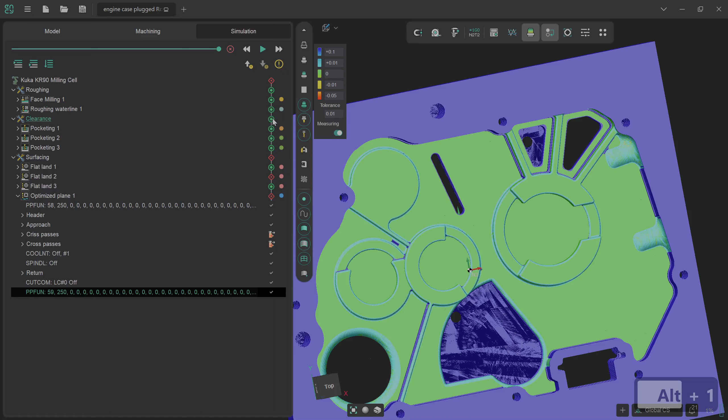Hi, so in this video we're going to start on the finishing process for this. I appreciate it doesn't quite look like it's ready for that yet, but bear with me. And we are initially going to start by cleaning up all of these interior profiles.

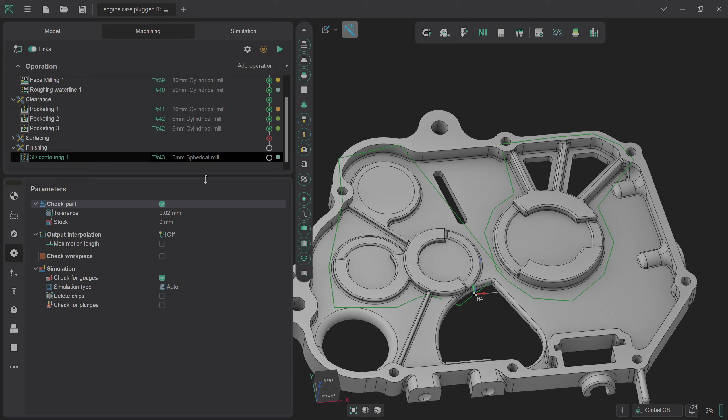So we go back to the machining space and we're going to define a new setup stage, which we are going to call finishing. And we are going to define a contouring path at this point. We're going to use the 3D contouring tool. We're going to stick with the 5mm spherical mill because the radius of a lot of these fillets is actually 2.5mm, which is very convenient for our needs.

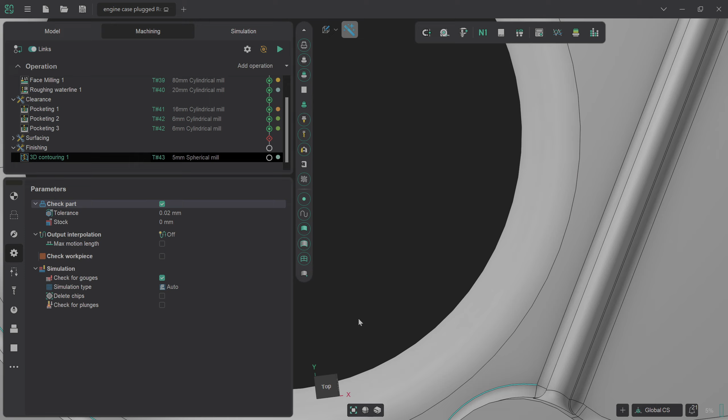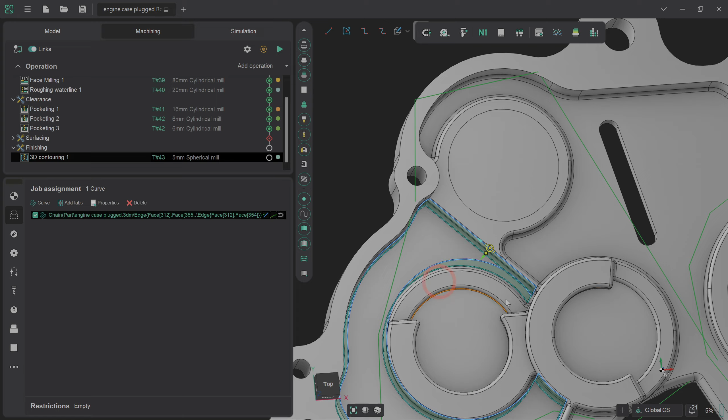And we are going to grab these contours and we're going to define them as our contour paths. So I'll just take a second to select all of these. And we now have our first one defined. So we will go to here and curve. And we want our cutting tool to be on this line instead of inside it, because that's the offset that we've got.

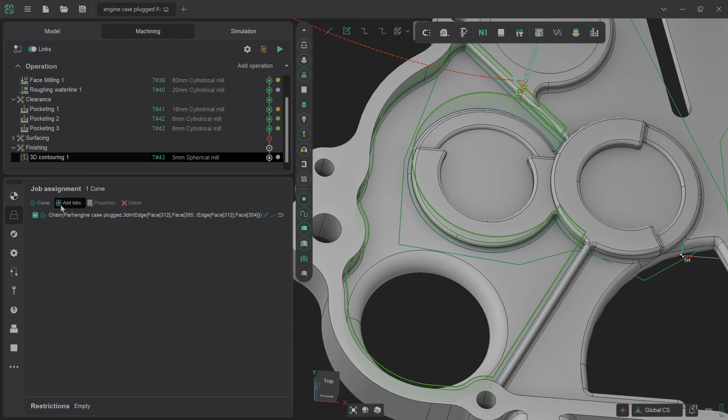And we will quickly set the 6th axis control again and then go back to generate the toolpath, and we should have a fairly clean toolpath from here. We'll go to the axis map just to double check, build the graph, update the toolpath, and we'll now simulate this. Fortunately, due to it just being a simple contouring path, it's a very quick simulation.

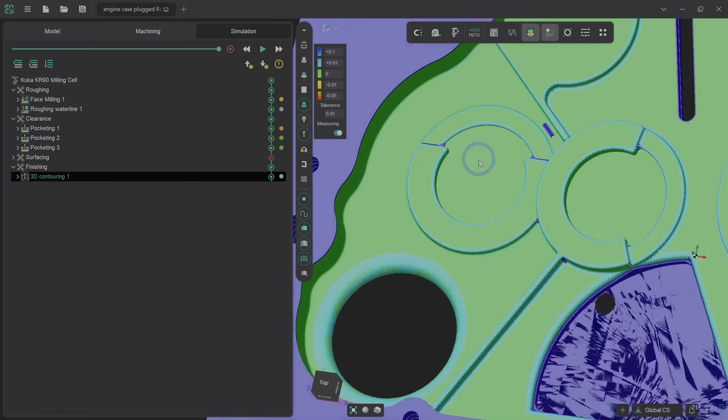So if we click run, we'll see how it's swept around there and there's no excess material left over. We'll do a quick verify compare, and that entire region is now a nice green. There's going to be a couple of small, very clean up parts to do in here, which is not the end of the world, but it's worth taking note of.

However, we can now copy and paste this particular solution for all of these panels all the way around. So I'm going to quickly go around and select all of these. I'm just going to pause the recording whilst I do so. And once I've got that ready to go, I'll come back to you shortly.

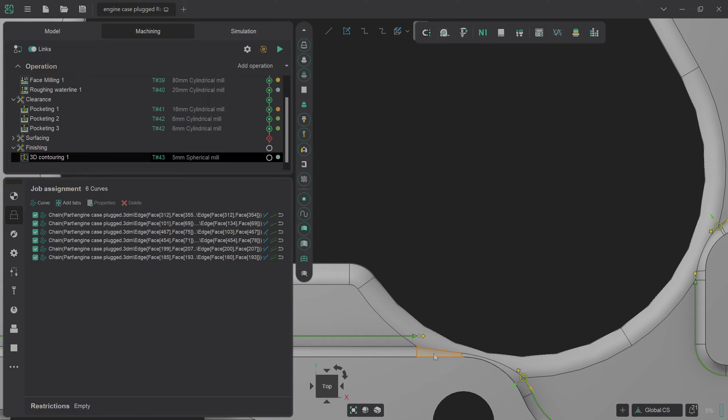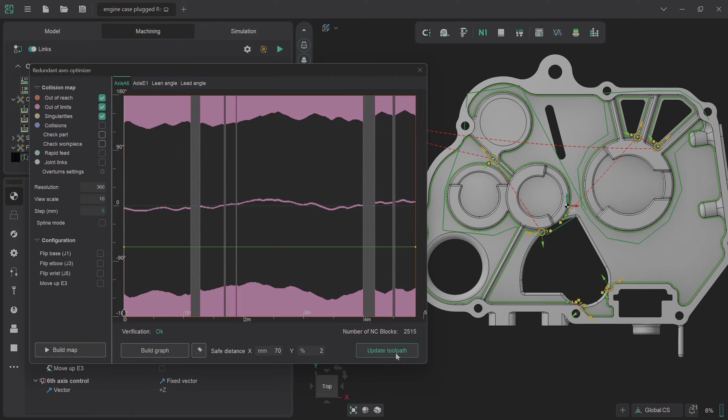Okay, so as we can see here, I've now selected all of these interior curve lines. I've kept them as separate curves where there's the small overlap regions here that we'd previously highlighted with our complex plane. So we can now go into generating that toolpath, and we can just double check the axis map again, which we should be becoming extremely familiar with throughout the course of this video. We update the toolpath and we are now going to go in for a quick simulation.

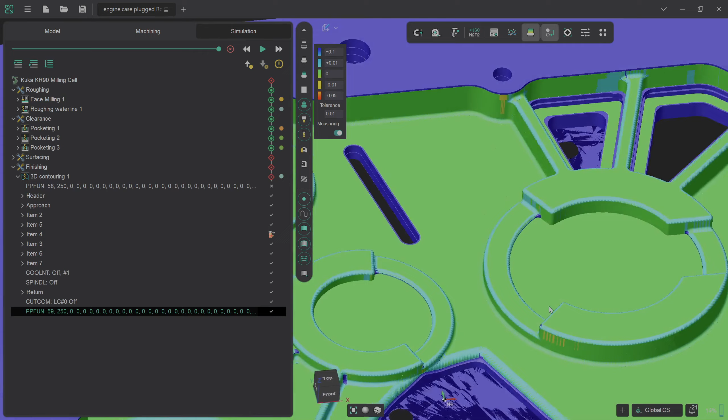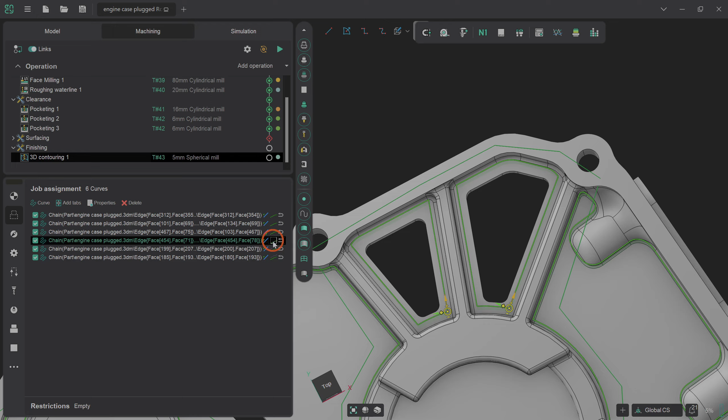And we're going to check the verify compare tool, and we can see now around all of these bases we've now got a much cleaner, much closer to the perfect zero mark than we did before, which is ideal. Although I've noticed that we've not seen anything much going on with these bits, so we're going to go back, and the reason for this is because these final couple of tool passes are not set to be on the line, they're set to be inside the line, which is very much my mistake.

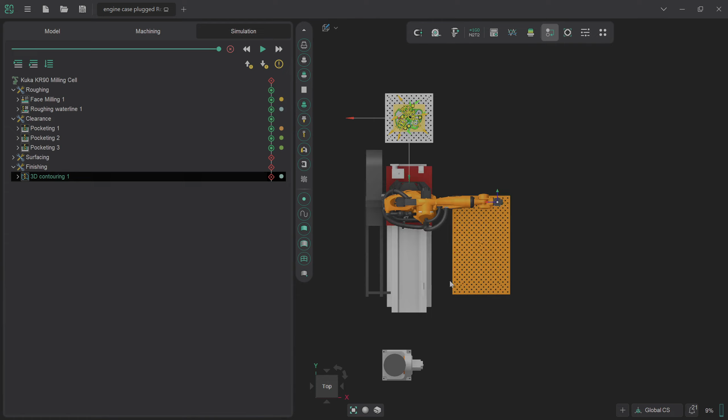So I'm going to regenerate that. This is something that's absolutely integral whenever you're dealing with contouring as well, so it's a mistake that's worth noting and very much worth picking up and learning from. So let's go back into simulation now and we'll rerun this. Let's just get a... don't know why that's flipped around. Sorry about this. Let's quickly rerun now.

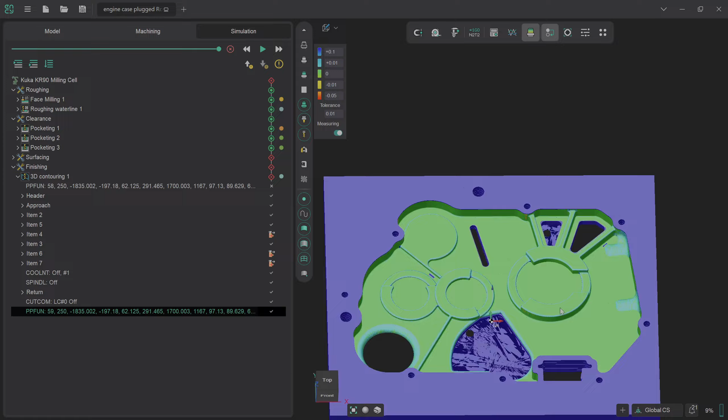And once that's run, we'll now do a verify compare, and we can now see that all of these regions are lovely and clear and green, which is exactly what we're after. So we're now getting pretty close to a more viable finished part. There is obviously a very small amount of excess deflection here.

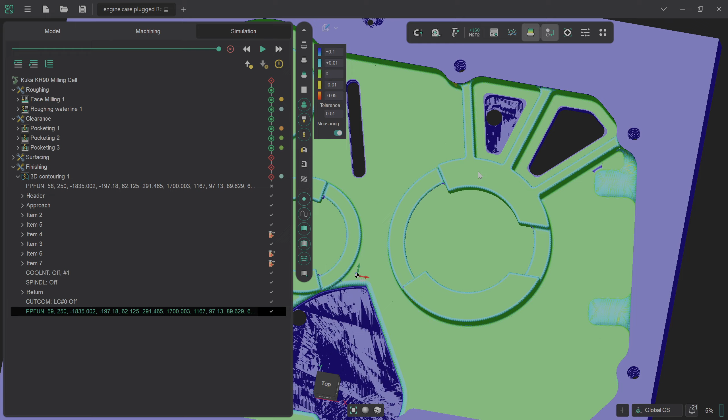We can go back and we can refine these complex paths by enabling the scalloping check on them as well. But I would like us to get to a stage where we've got a more complete part before we start fine-tuning the last details of it.

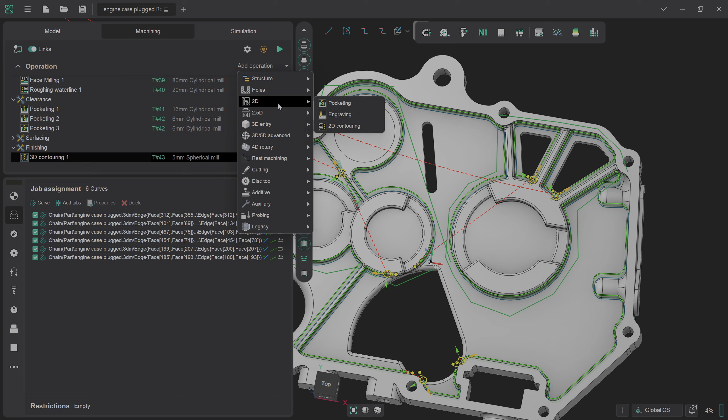So we are now going to start looking at cleaning up all of these profiles as well. So I am going to go back and we're going to use a 2D contouring path for this time. So we go with 2D contouring and we're going to select each of these curves.

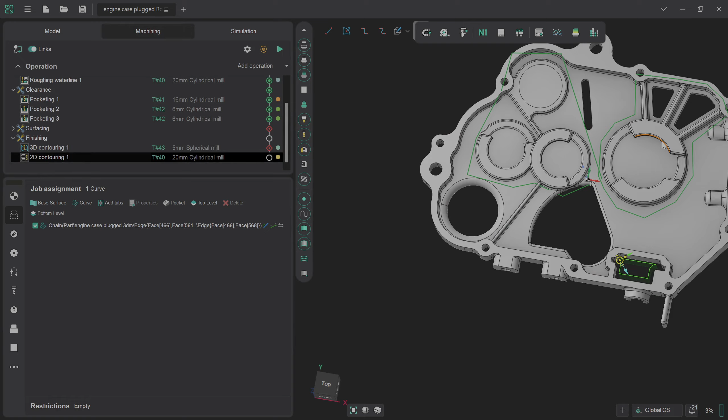So if I remember correctly, all of the bores, yep, they had a little bit of excess on them. So we're going to go around through all of these on the two separate level planes that we had determined before. And we're going to select each of them and we are just going to clean them out, get them to final size.

So let's just grab the last of these and select those curves. Okay, and obviously we want our contouring to be on the inside of these, but we don't want there to be any excess to account for.

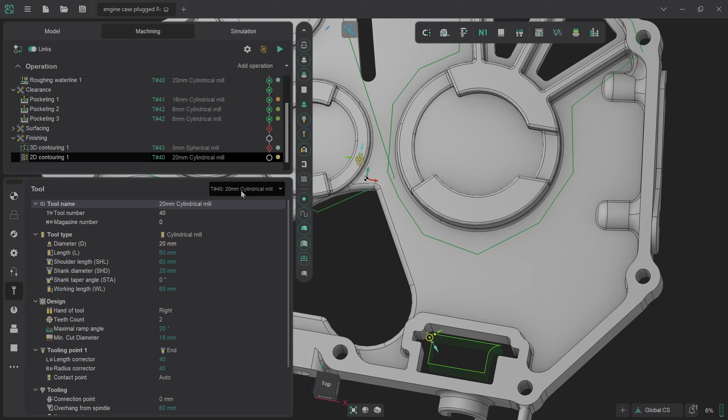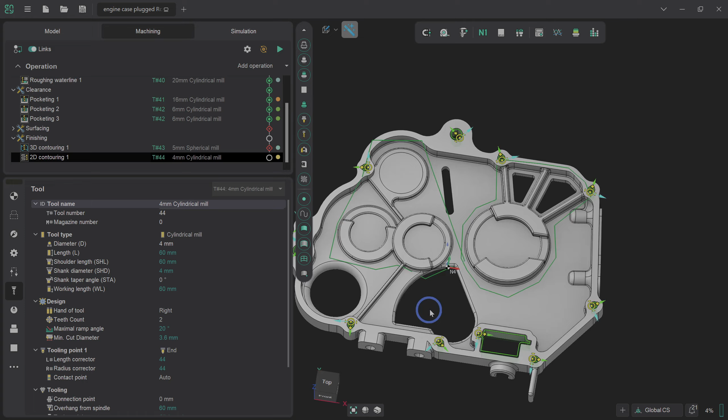We're going to change the tool on this from a 20mm cylindrical mill to, we're going to go with like a 4mm, we'll go with the 4mm cylindrical tool. So if we select this one for now, and then we change the diameter on it accordingly, and set it as a new tool. We'll keep the lengths and everything the same for now. And we do the last little bits we need to do before we run it.

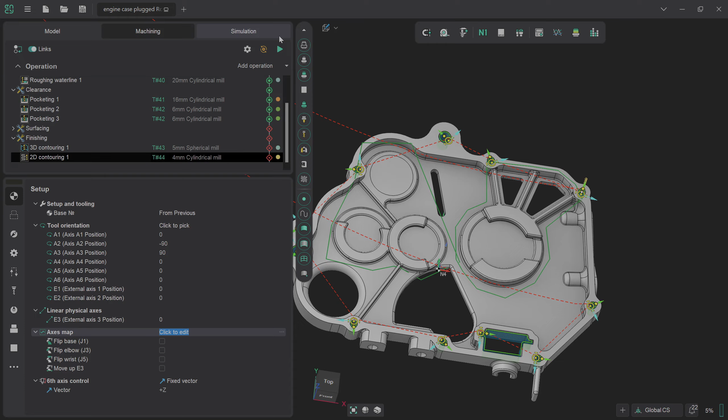Okay, so we're going to have to quickly go through that toolpath. Update and run now. Now if we simulate this, we should see all of our bores get cleaned out and brought to the correct size, at least all of our deep bores, and then the shallow bores we'll do in the next pass. Just very quickly check compare. Lovely green surfaces there. This is exactly what we want to see.

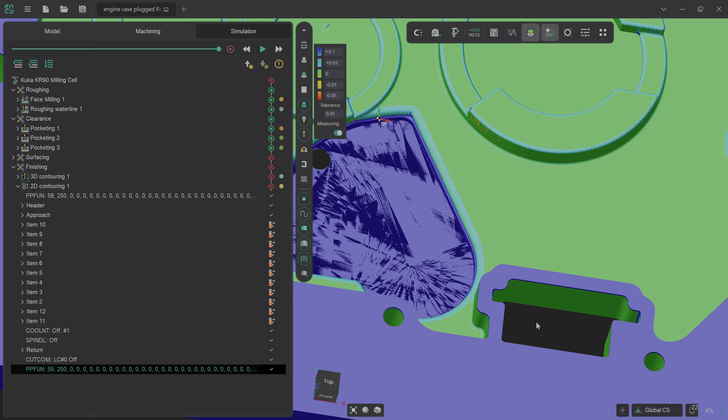Now again, as I say, the difference between the solid model like this and the voxel model like this is much closer to actual real world precision, whereas the voxel model is significantly better for more organic forms because it's volumetrically defined instead of working off of solids. It does mean that it lacks a little bit of the final precision compared to this though. So this for hard material surfacing is exceptional and cannot be beaten in my opinion.

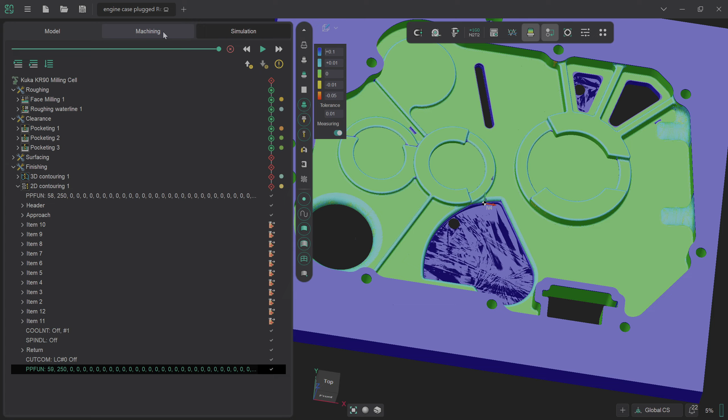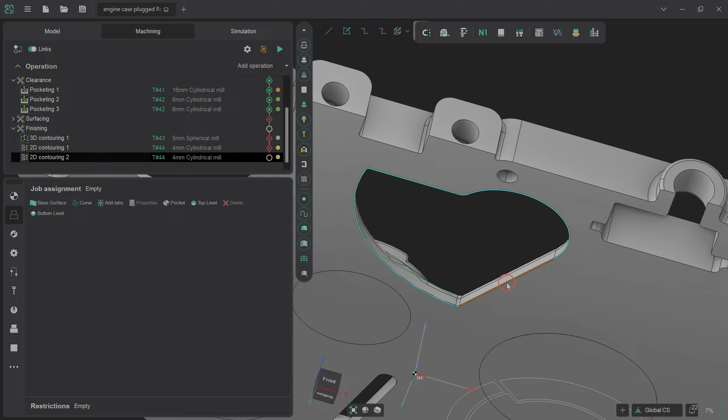So I'm going to turn that back off and we're going to go back now and we're going to duplicate this 2D contouring path and we are going to redefine each of these parts that we're going to be cutting, because we're not going to cut those ones. We are instead going to go from beneath because these parts have got curved lines to them. So we're going to select that curve. We don't really need to go from underneath for these ones, but we've got it, so why not?

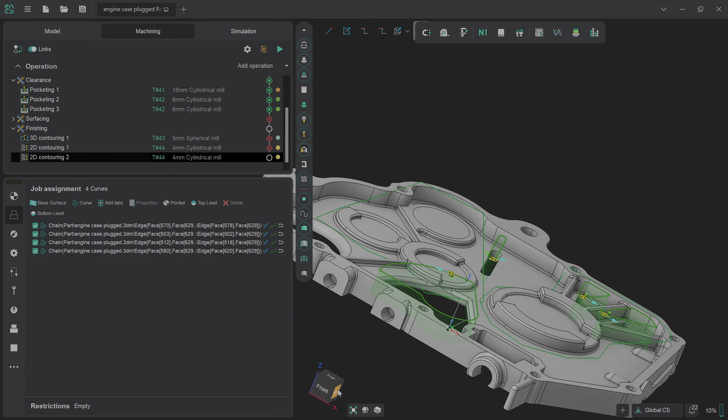And we are going to grab that one as well before I forget. Don't know why I keep forgetting that one. It's every bit as important as the others. We are going to define our top level, and that should see us done for that. So fixed vector is good. Generate the toolpath. Give it a second to think about it. And then we check the axis map and we should be good to go.

Sorry, there's my dog shaking his head in the background there.

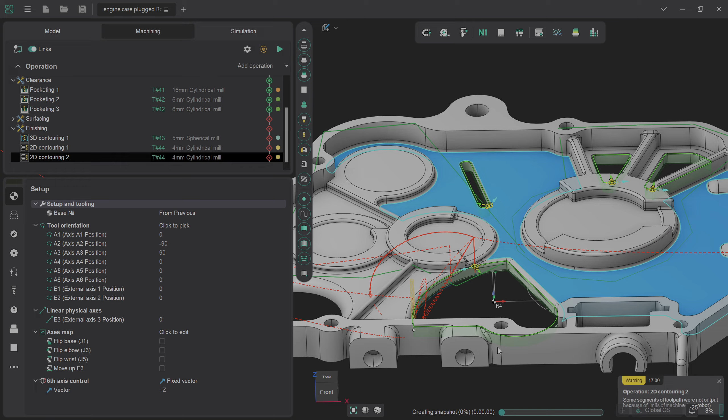Okay, so go to the axis map now to try and resolve these minor issues that are coming up. We build the graph and we update the toolpath, and that, I believe, is us ready to go. So we now go back into the simulation environment, quickly run through these, and we check.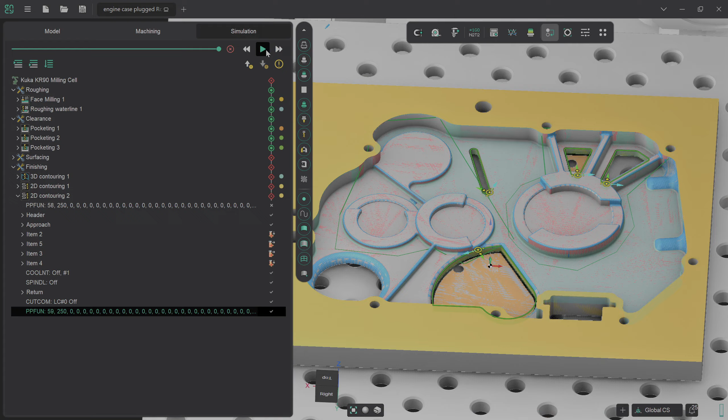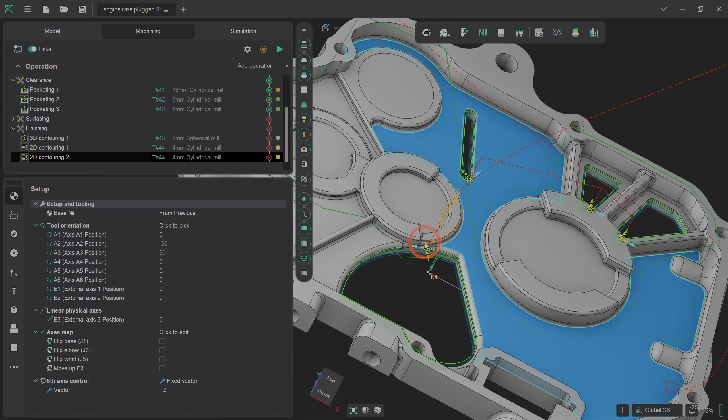And we've still got a bit of blue in this one, which is interesting. So I think we're going to have to quickly work through this bore again. The rest of these bores all look good though. So let's focus on this bore, see what we can do about resolving that problem. So at the moment we have got... Right, so we've selected this face and I'm just noticing there's a slight deflection out here. So what I'm going to do is I am going to set another contour here.

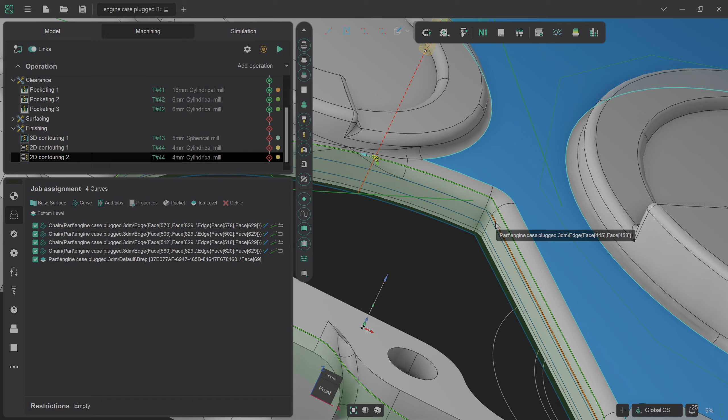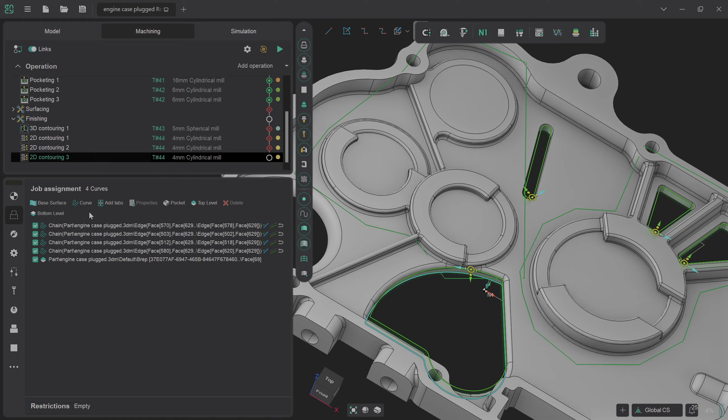Let's go using this. No, not that line. We'll use this line here. Okay, so we've still got roughly the same contouring profile, but it's just in a tiny bit from there. We will duplicate this operation, and we'll set this as a separate curve to cut. We'll delete that because there is going to be a small amount of taper in there.

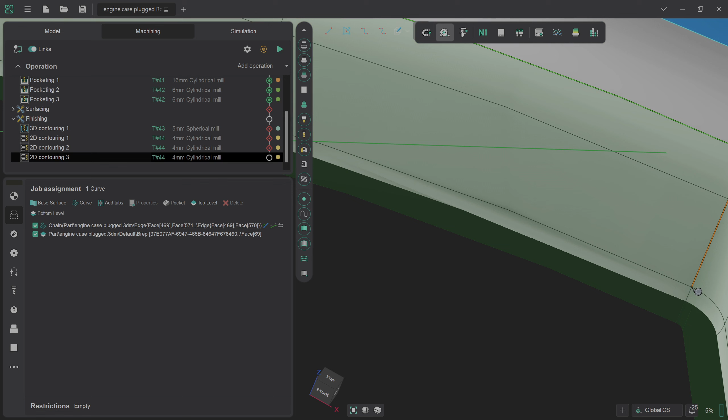So I'm going to set this as the top level, and I'm going to very quickly measure this because obviously we don't want to chew the taper that's in there just in case it becomes important later on. But that's 0.9 of a millimeter. So if I set the bottom level on this to 51 millimeters, that should see us largely sorted. So I'll generate the toolpath accordingly.

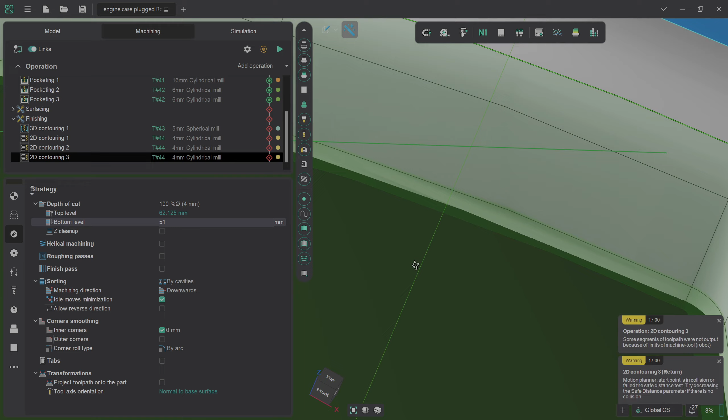And we are going to look at the axis map, build the graph, update the toolpath. Now we go back into the simulation space.

Sorry, these camera flips must be very disorienting. I do apologize.

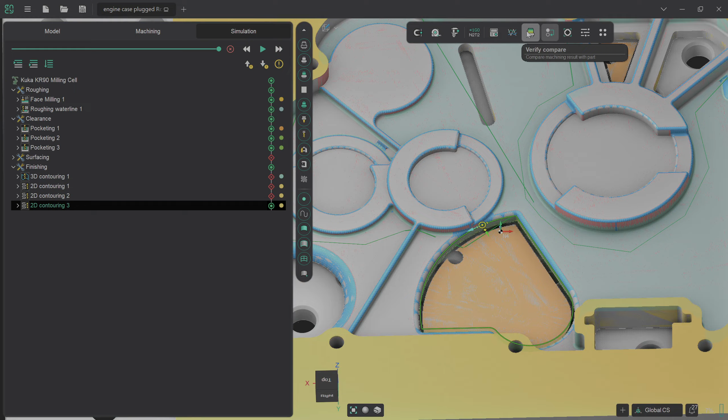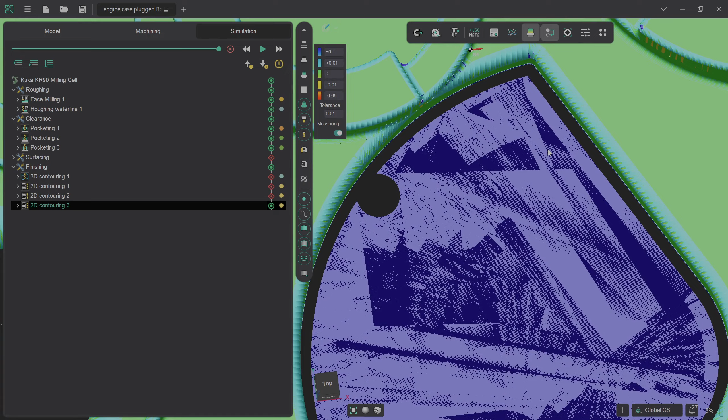We simulate that last path. Verify compare. We can see that's all coming up green now, which is great. There is a tiny amount of blue there because I used a sharp edge tool, but most importantly, I don't want to see any red coming up in there where it's cut too deep, and I don't know what the angle of deflection on that is. But we now have generally a very, very clean looking model there, which is absolutely fitting most of our needs.

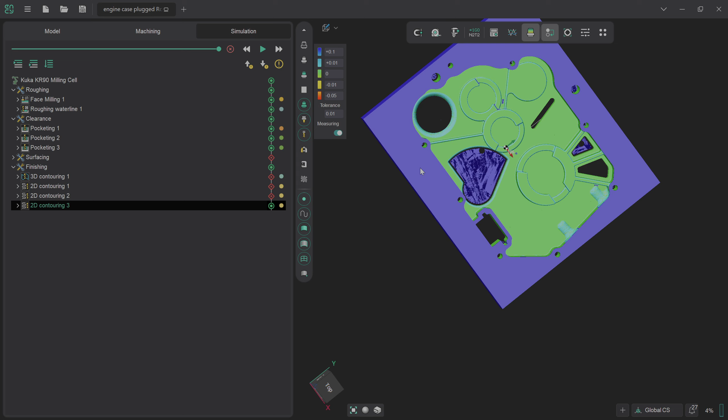So we can start looking at the final part of the finishing process, which I'm going to split off into a separate video at this stage, which is going to be the exterior profiling. There's also going to be a little bit of the optimized planar toolpath in there as well. And there's going to be some final finishing planes and then a little bit of contouring, and this series will be complete. So I'll see you in the next one.